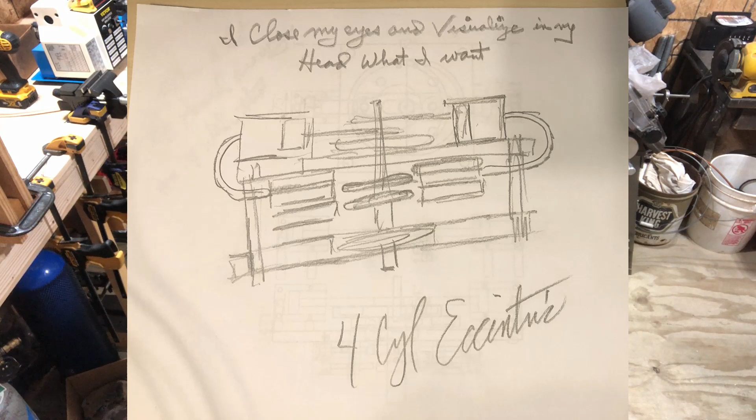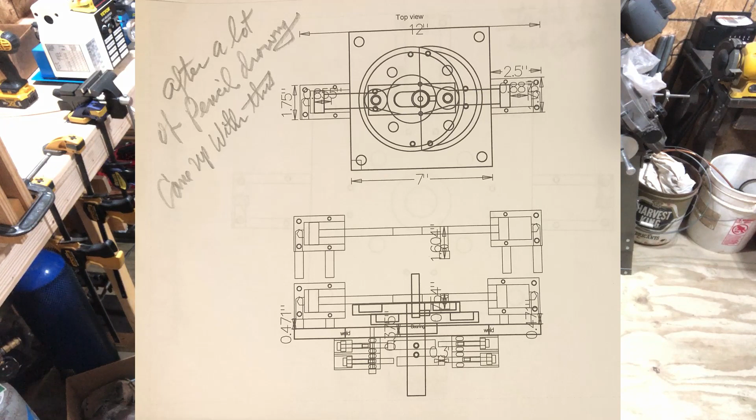Like I say, in February, I thought, well, I need to pick the best one, so I kind of closed my eyes and visualized in my head which of the motors that I've worked on I think were the best. I decided on a 4-cylinder eccentric design, so I kind of sketched it out on a piece of paper and thought, well, I'll have to start from the very basics and kind of build it somehow, so that's what I did. I kind of sat down and drew out a design from things that I had done in the past, and I'm going to sort of use that as a basis to go from.

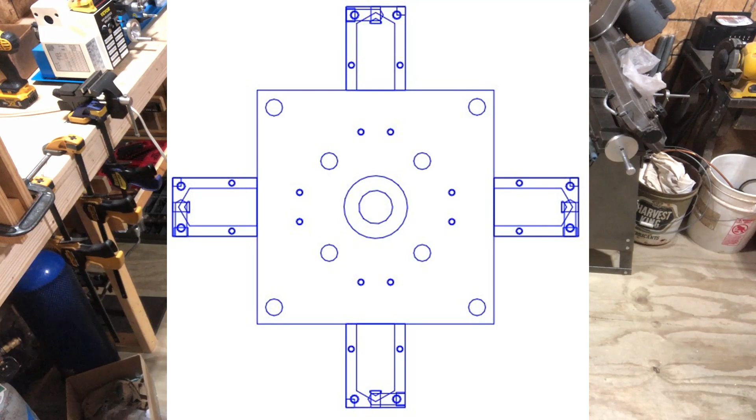So the very basic I need is a base plate for everything to mount to and a place to start from. So I decided on a 7-inch square base with cylinder mounts on each side, which makes it about 12 inches wide. Now everything will be attached to this as the main component. And I build components more or less and mount that to this base plate on paper to make sure that everything fits together.

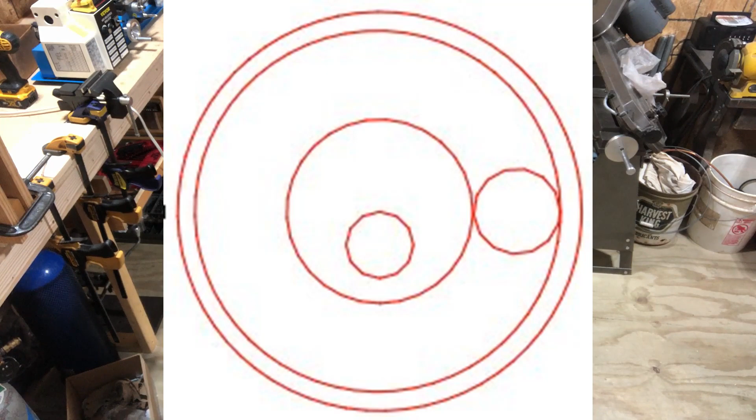So the next thing that I worked on was the eccentrics, the main part that rotates and drives the drive shaft. I need 2 of them to make sure that it's balanced. So it's called a 2-plate 4-cylinder eccentric compressed air motor. This is the design of an eccentric. And it's driven by a bearing that rides in the groove, and that bearing is pushed and pulled in order to cause the eccentric to rotate.

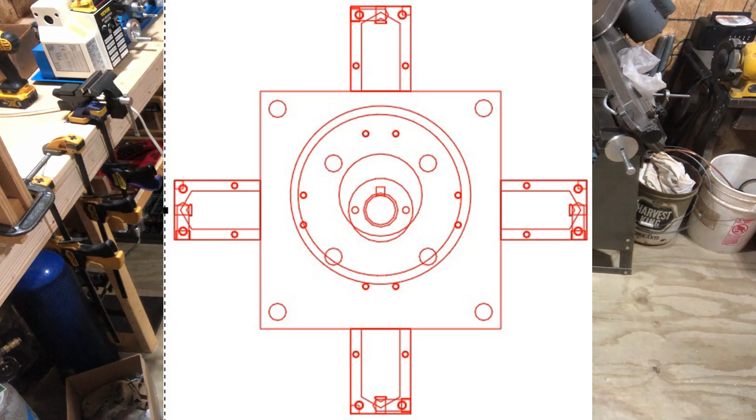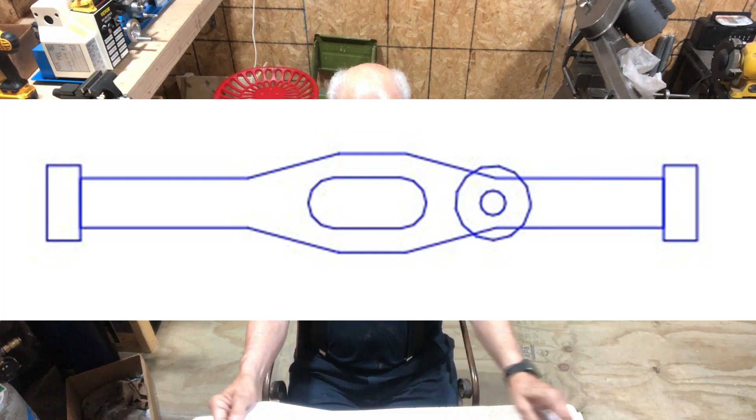At first, I was going to have separate push rods for each cylinder, but as time went by, I decided that it would be better to have 2 push cylinders, a cylinder on each end, and have it drive 1 bearing instead of 4 cylinders driving 4 bearings. This is much simpler, and I think it will be more effective in the long run. It takes 2 of them to make a 4-cylinder, so they are put together crisscross, so there are 2 opposed cylinders and 2 opposed cylinders in the opposite direction.

Then I need to have valves, so I decided on which valves I would like to use, and they're the ones that I developed at the very, very end of last year. I've had problems with valves leaking ever since I started trying to build an engine. And I think I've gotten to the point where these are almost foolproof and will seal.

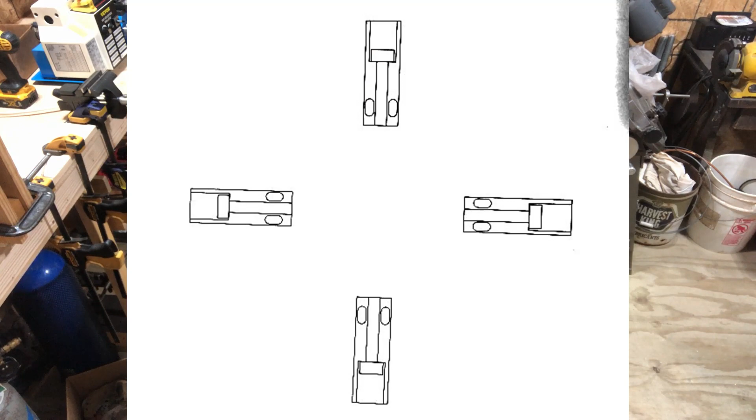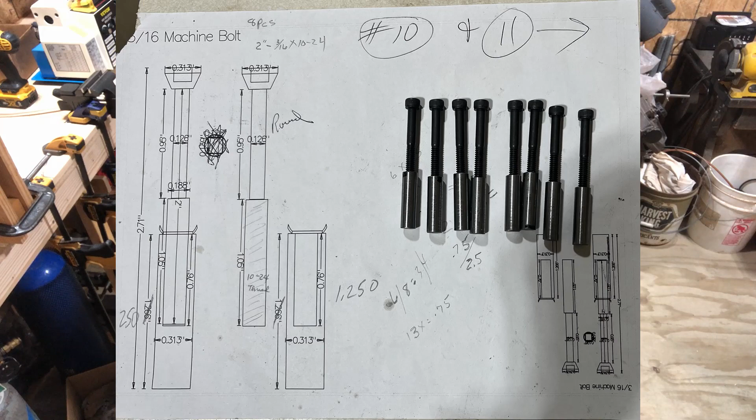But I have to have 8 valves altogether. 4 of them would be for the intake, and 4 of them would be for the exhaust. And they would mount underneath the plate. And then I had to make a set of 8 valve stems, which I've shown you in the past, but I will show you again. There's a small leather seal that goes around the 2 pieces once they're inserted into this valve body.

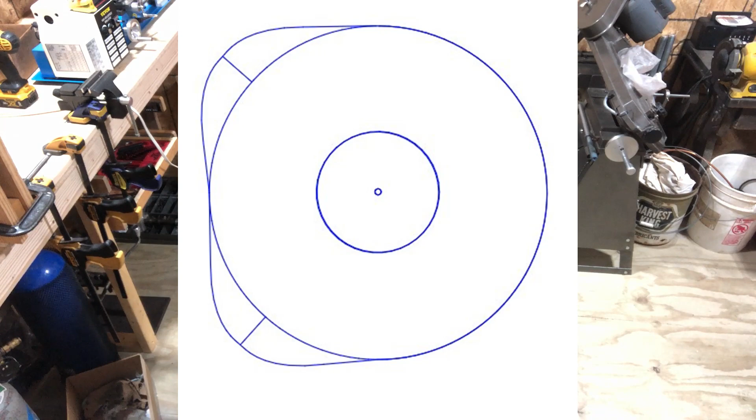The rotor that will be driving the valves is a 2-piece rotor. I'm not exactly sure if they're going to be as I've designed it right here. I might have to make a few changes when we actually see the timing of the eccentric when it's actually put together. I can't really predict that, I don't think. But we shall see. I can always work on it and get that put together correctly.

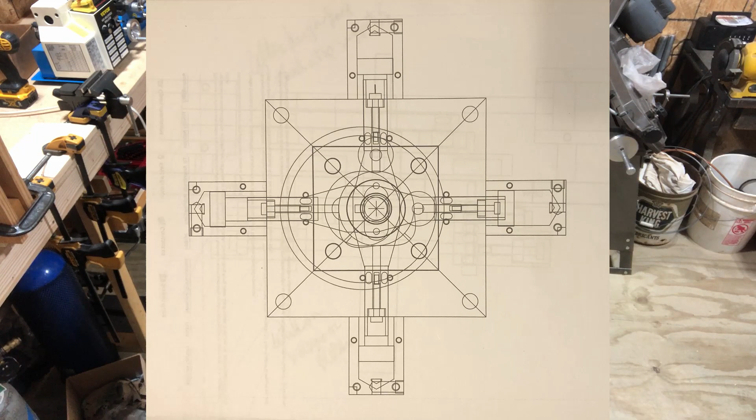So the first thing that I show is the 7-inch square base mount with the pistons, the push rods, and the eccentrics all mounted on the plate. The valves are also on there, but I'm pretty sure it's difficult for you to see those. They are mounted underneath the plate instead of on top of it. And then I had to come up with how do I get air to the cylinders and to the valves.

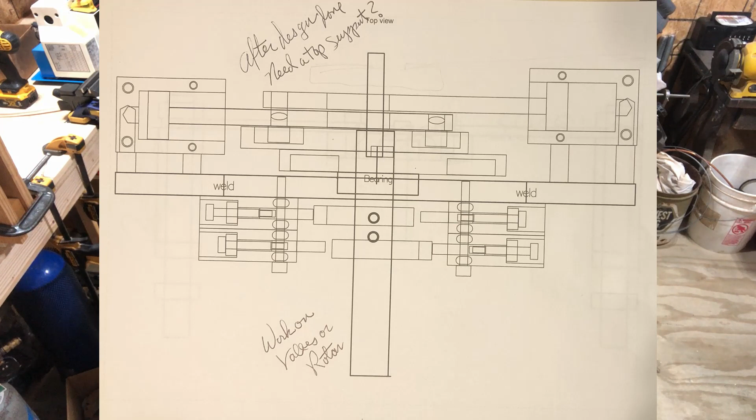So the next picture shows 4, but there's 8 valves. The intake is the first one underneath the plate. The exhaust is the one underneath the valve that we just put on. So there's 8 of them there.

Had a little problem with my camera on the video there. It just shut off on me, so I guess I'll end the video.